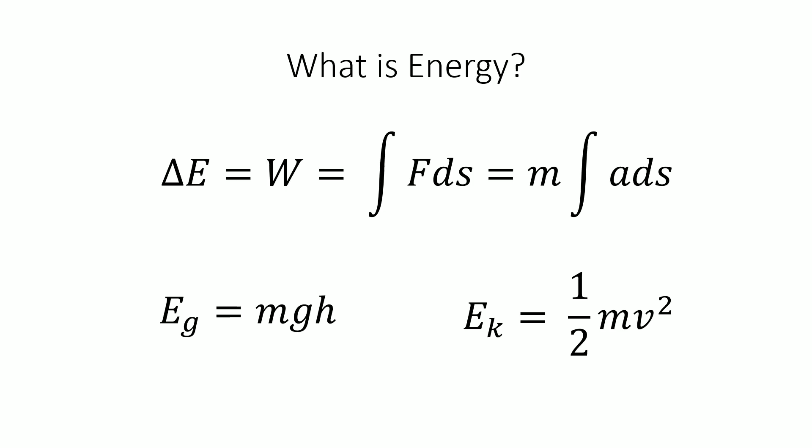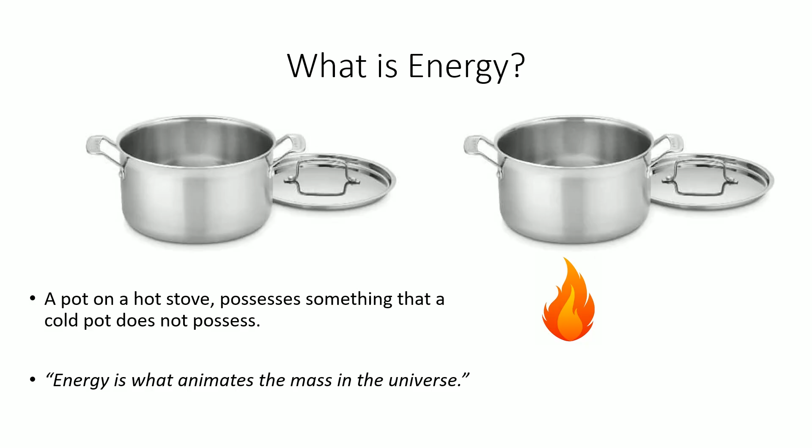A more simple way to think about it is, let's say you have a pot with water and it's boiling. And let's say you have the same pot with the same amount of water, but it's not boiling. Well, the boiling pot possesses something that the other pot does not, and that something is energy. How I like to describe it is that energy is what animates the mass in the universe.

Now, it can take on different forms, and we can convert it from one form to another. What's especially convenient about that is that electricity is a very convenient way to transport energy. So you can convert energy into electrical energy, transport it to another place, and then convert it back into the energy you want.

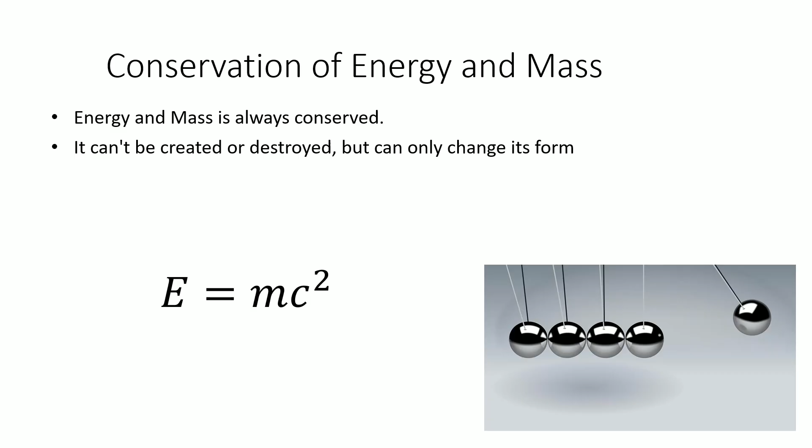Now, before we get into the details of how to do that, we also want to make note of mass. So what Einstein showed us with his famous equation E equals mc squared is that mass and energy are also the same thing, just different forms of it. So mass itself is also just a different form of energy in a way. If you take a piece of mass, multiply it by the speed of light squared, you get the amount of energy that that mass is equivalent to. That's actually how nuclear reactions work. They take mass and convert it into energy. And because the speed of light is such a high number, and speed of light squared is an even bigger number, a small amount of mass gets you a huge amount of energy.

So, for example, you can use a fossil fuel plant or a nuclear plant to use thermal energy, convert it into electricity, transport that electricity to your house, and then plug in, say, a speaker into your wall, and that energy is converted back into kinetic energy, because that's how your speaker works. Or you have a wind farm or a hydroelectric plant. Well, they take kinetic energy, which is the energy of motion, and convert that to electricity, which is then transferred to someone's house, and there it's converted into whatever the person wants. Solar panels work differently. They're actually made out of a crystal which releases an electrical current if you shine a light onto it, and that's how they generate electricity. So there's different ways to do it.

Now, in a lot of power plants, you have a spinning part. In wind farms, you can see it spin right there. In hydroelectric plants, water is spinning a turbine. In thermal power plants like fossil fuel plants and nuclear plants, you have steam that's turning a turbine. Here's why. There's a natural phenomena, and I won't get into all the details of how to design a generator.

I could do that in a different video, but roughly speaking, if you have a magnetic field and you change the velocity of a conducting material within that field, you get a current moving through it. You can design a specific shape of conductor such that if you spin it in a magnetic field, it'll generate electricity. Then the question becomes, how do you make it spin?

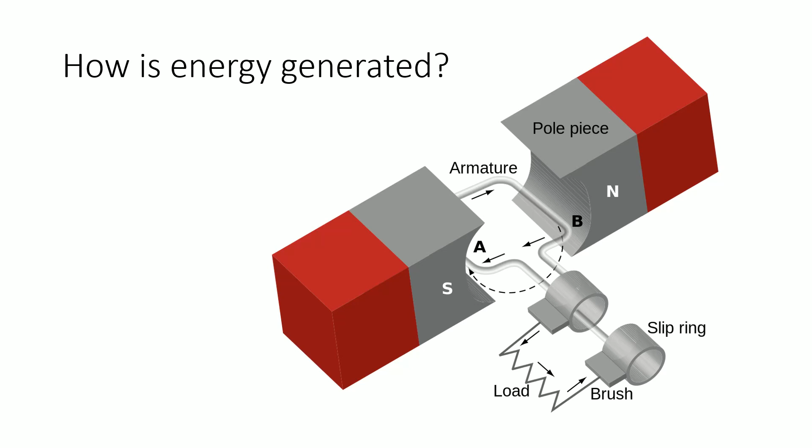A thermal power plant uses steam to rotate a turbine, which is connected to a contraption that looks something like this, and that generates electricity. So the question then is, how do you create the steam?

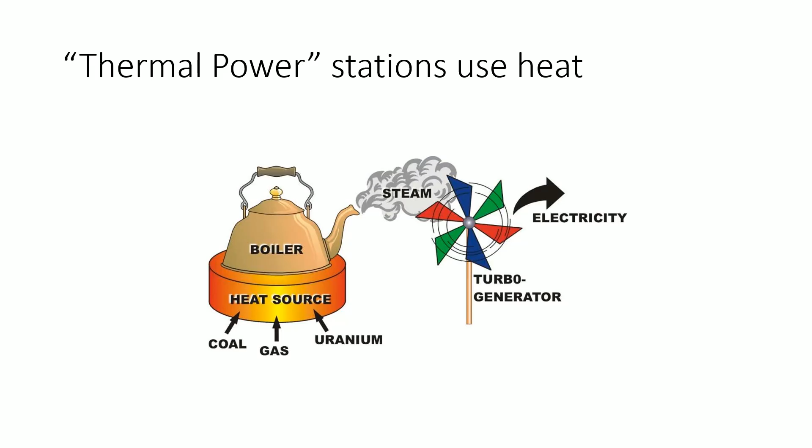Well, by boiling water. How do you boil the water? If you burn coal to boil the water, that's a coal power plant. If you burn gas, that's a gas power plant. If you use a nuclear reaction, that's a nuclear power plant. If you're not using steam, and you're spinning it directly using water or wind, that's a wind farm or a hydroelectric plant.

So you have many different energy sources, and a lot of the time they're separated into those that emit gases as part of the energy production process and those that do not. The emitting sources include biomass, which includes something as simple as burning wood, and fossil fuels like natural gas, coal, and petroleum. Non-emitting sources include solar, wind, nuclear, and hydro.

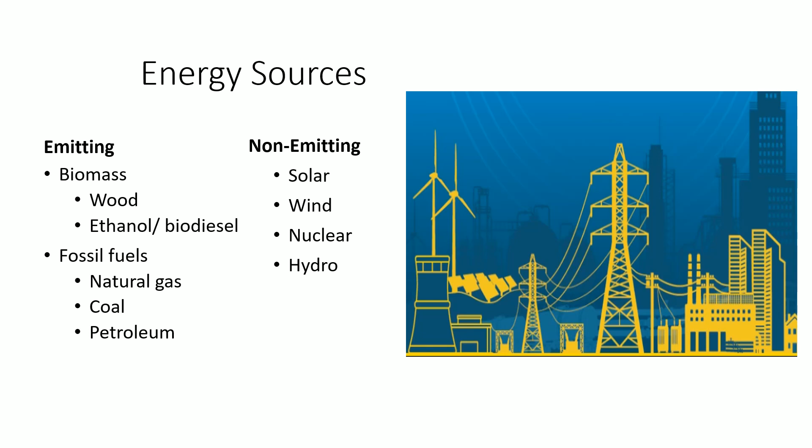Now, all energy production methods do produce waste. People think of renewables as something that doesn't produce waste. They think, oh, solar, wind, hydro, there's no fuel involved, it's just sunshine and flowing water and wind. In that part, there's no fuel involved, but you still have to manufacture the materials, and the materials wear down. You still have to dispose of the materials, so there's still waste involved.

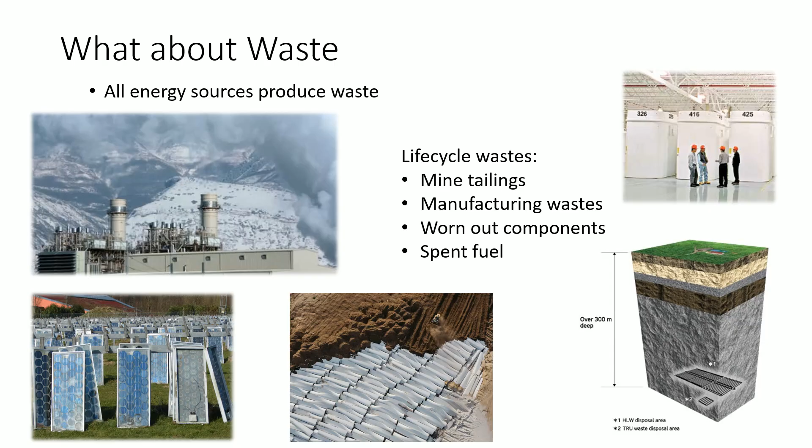They also mention birds being harmed by wind turbines. This is one of the issues with this particular power production method. It's not just birds—birds, bats, and insects do get killed by wind turbines. It's not just crashing into the turbines that can harm these creatures, but the turbines create pressure changes as well. These are quite drastic pressure changes for the lungs of birds and bats, which can also harm them, so deaths can occur from that as well, not just from crashing into the turbines.

There are ways this can be mitigated, or that people try to mitigate it. For example, where wind turbines are built, and when they're operated, so they're not operated when birds are migrating. These methods can reduce harm to birds, but they have limitations. For instance, you want to build wind turbines where there is stronger wind, but that's also where it's easier for birds to soar. Also, rodents can hide underneath the bases of wind turbines, which attracts certain birds that hunt them. So there are limitations to these methods, and it is a subject which is debated.

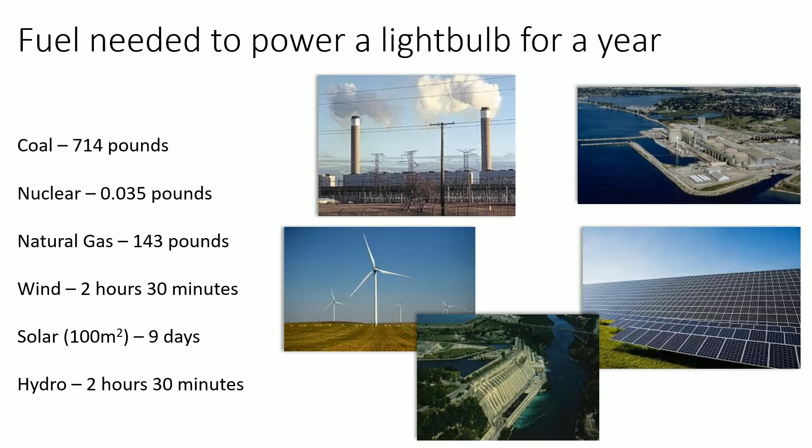Now, for wind and hydro, it's about 2 hours and 30 minutes of operation to produce the amount of energy needed to power a light bulb for a year. And for solar, assuming you have 100 square meters of solar panels, it would take 9 days.

Now, if nuclear is so great, if it's so incredibly efficient, and it doesn't release greenhouse gases when producing energy, then why not use nuclear for everything? Well, there are a few reasons. The reasons discussed on the podcast are people's concern because of a handful of nuclear accidents that were very significant accidents, and it makes people nervous about nuclear energy. They mentioned the difficulty of building very large nuclear power plants.

But there is another reason, which is that energy demand fluctuates. Throughout the day, people need more in the daytime, less in the nighttime. And so energy production also needs to fluctuate. We don't really have technology that is sufficiently capable of storing large amounts of energy. Our battery technology just is not that advanced. So we need to fluctuate our energy production in order to meet the fluctuating energy demand.

Now here's some terms. The minimum amount of energy that needs to be produced throughout all these fluctuations is called the base load. And the maximum amount of energy that needs to be produced is called the peak. You have energy demand fluctuating between the base load and the peak, and so the supply needs to fluctuate like that as well.

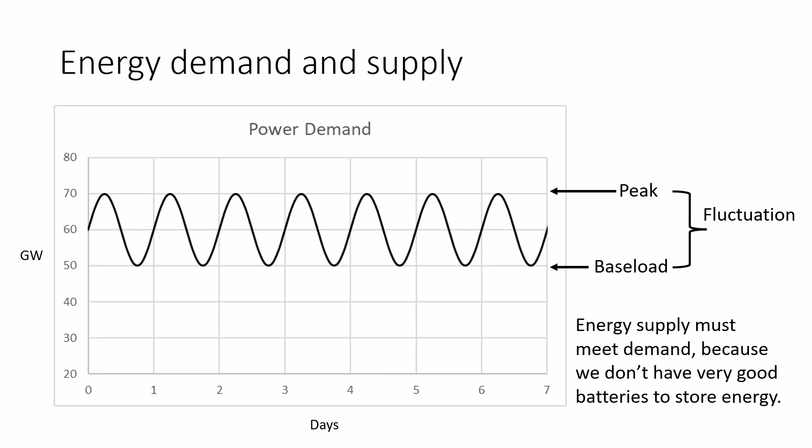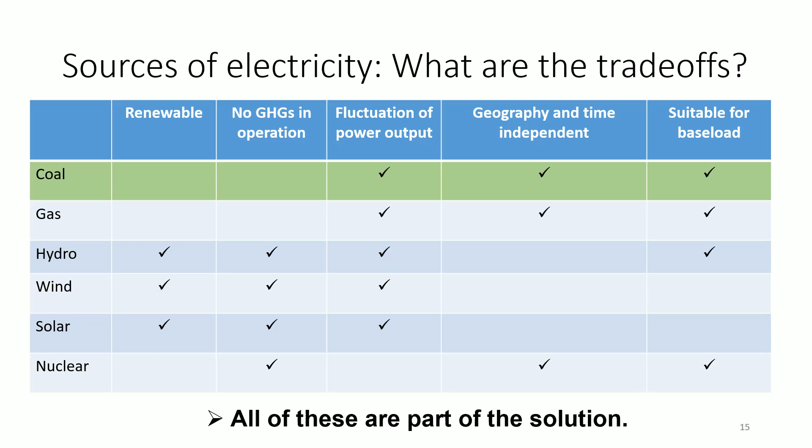So how would an ideal electrical grid look? Well, you have nuclear satisfying your baseload, and then for the fluctuations you use other renewables where possible, depending on the weather and how much of them you can get per day. You use those to reach your peak, to get as close to your peak as possible, and then for whatever's missing, you use fossil fuels to make up what's missing. That's the convenient part about fossil fuel plants - you just turn them on and off, produce as much energy as you need when you need it, and turn it off when you don't need it.

So nuclear for the base load, other renewables as much as you can to reach the peak, and if you still haven't reached the peak with nuclear and other renewables, then you use fossil fuels to make up for what's missing there. That would be the ideal case.

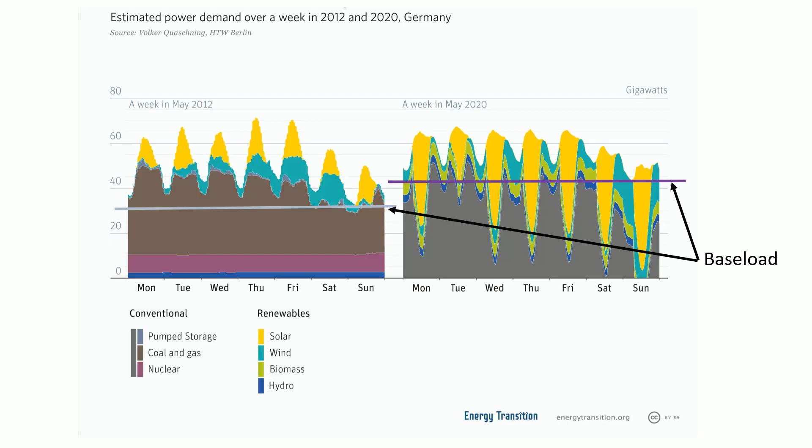Now imagine that nuclear was used as much as possible in these situations. Nuclear would satisfy your base load, so you would produce nuclear to meet that minimum amount in both cases. Then you have much less to make up, and the other renewables can make up pretty much all of it. Then we're closer to this ideal situation that we see on this slide here.

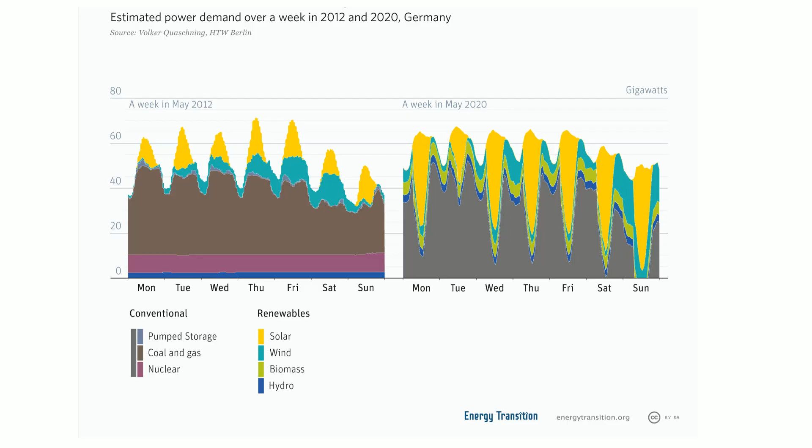Now when they discuss nuclear, they discuss the difficulty of building it. They talk about concrete a lot, and they talk about some nuclear accidents which make people nervous about nuclear. I'm not going to get into the design of different types of nuclear power plants, that could be a whole other presentation, and if you're interested let me know in the comments, I can make a presentation on that as well.

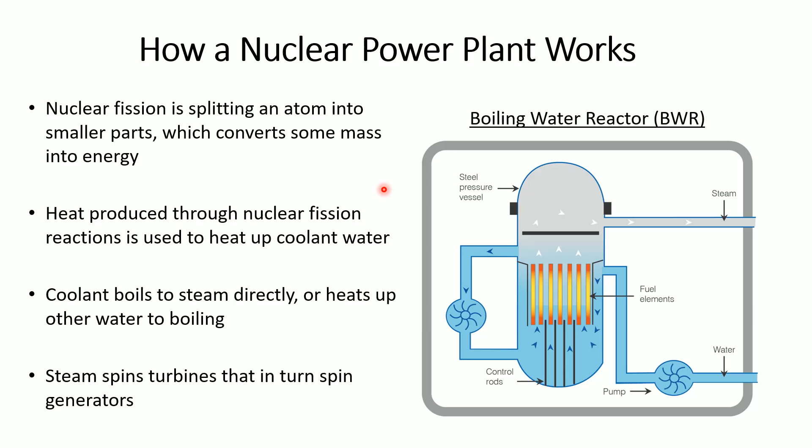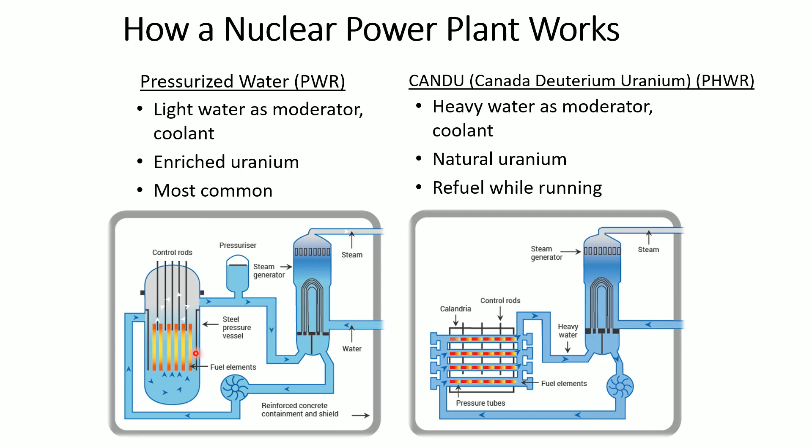You have your reactor where the water heats up. It heats up a different loop of water where you have water coming in and steam coming out. This part is called the steam generator, and it's inside this dome of concrete. A big purpose that serves is to stop radiation from exiting the structure.

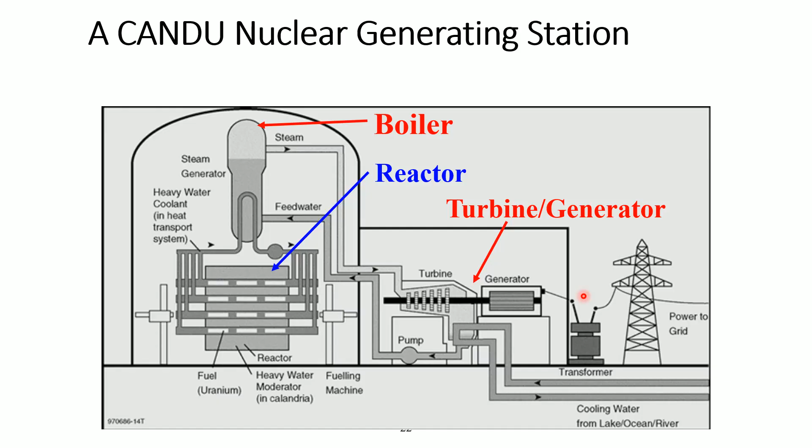So what is radiation? Well, a lot of people think radiation, they think electromagnetic radiation, which we're most familiar with in terms of visible light. This is, for lack of a better word, a type of wave that just exists in nature, called electromagnetic radiation, and they have different wavelengths. The wavelengths we can see range from red to violet.

So the larger wavelengths look more red to us, and the smaller wavelengths look more violet to us. Now, wavelengths even larger than red, our eyes can't detect, but we still use them. These are called infrared, microwaves, and radio waves, which we use for communication, like our cell phones and internet.

Now, once wavelengths get smaller than violet, our eyes can't detect them, but we do still interact with them. These are ultraviolet rays, X-rays, and gamma rays.

Once those wavelengths get smaller, that's when they can get more harmful. Ultraviolet rays, that's why you need protection from the sun. X-rays, that's why there are limits on how much X-ray exposure you can get per year, and why you wear protection when you get an X-ray. Even smaller wavelengths than that are called gamma rays, and in nuclear reactions you get gamma rays coming out too, so you need concrete to block it.

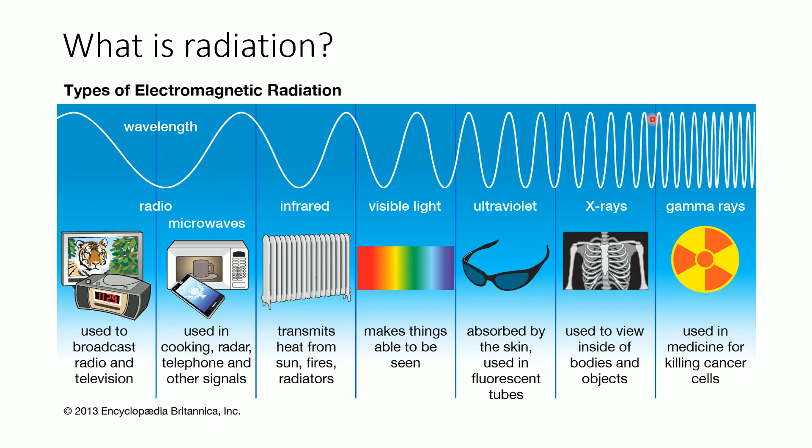But you also have other forms of radiation called particle radiation. Alpha radiation is 2 protons and 2 neutrons flying through the air. Beta radiation is an electron flying through the air, and these are easier to stop than gamma rays.

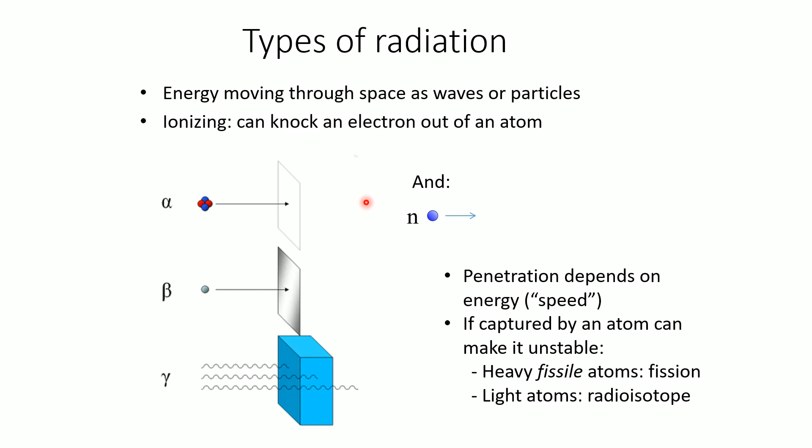But you also have neutron radiation. Neutrons don't have a charge. Protons are positively charged, electrons are negatively charged, so as they fly through the air they might curve and bend towards something that attracts them or away from something that repels them. But neutrons, because they're neutral, just fly straight for a long, long time, and that's what makes neutron radiation more harmful as well. Concrete is used to stop that too.

Now, radiation is a natural part of the world around us. As an analogy, it's kind of like microbial life, germs — it's a natural part of the world around us. We're interacting with the sun all the time. There are objects, everyday industrial and household objects, which also emit radiation that our eyes can't detect. It's just a natural part of the world around us, but if we get too much of the harmful type without using protection for a long period of time, that's when you can get hurt.

For example, ultraviolet rays from the sun, or if you get a very large dose of radiation in a short period of time that your body can't handle, that can be harmful as well. Just like being around germs — you're always interacting with them, but if you're interacting with too many of them over a long period of time without proper protection, that can cause problems. Or if you get a very large dose of them in a short period of time, your body can't handle it and you get problems from that.

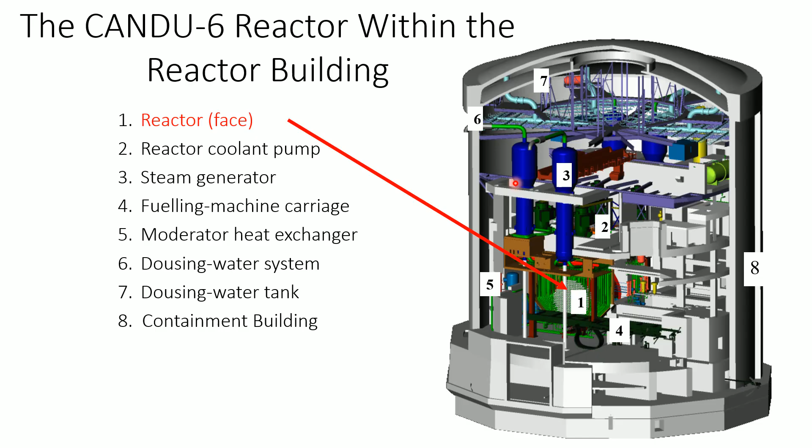When you had radiation coming out at very high levels, there wasn't concrete to stop it. When the initial explosion happened, you didn't have a concrete dome to block materials and gases from spreading upward. And even if the concrete dome breaks, which happened in Fukushima, you had structures breaking, so you have concrete falling down onto the reactor, and even that broken, fallen pile of concrete creates a certain level of protection. You didn't have that at Chernobyl.

So not only was Chernobyl built in a flawed manner, it was also operated in a flawed manner. If it was operated correctly, despite the construction flaws, the disaster would not have happened as it did. If it was operated incorrectly, but didn't have the construction flaws, again the disaster would not have happened as it did. You actually did have safety mechanisms at Chernobyl that were kicking into place as they were supposed to when the plant was being operated improperly. But because that was interfering with an experiment people wanted to conduct, they shut off the safety mechanism. And then the disaster occurred.

It's also important to note that the explosions at Fukushima and Chernobyl were not nuclear explosions like what you'd get from a nuclear bomb. These were conventional explosions, but because they occurred in places with radioactive material, they spread radioactive material through the air and onto the land. Also, if these explosions breach the containment structures, or in Chernobyl's case where there was no proper containment structure to begin with, and you still have a nuclear reaction going on, that can also spread radiation through the area. A nuclear power plant cannot explode the way a nuclear bomb explodes. It's a completely different technological mechanism, even though it's made out of some of the same material.

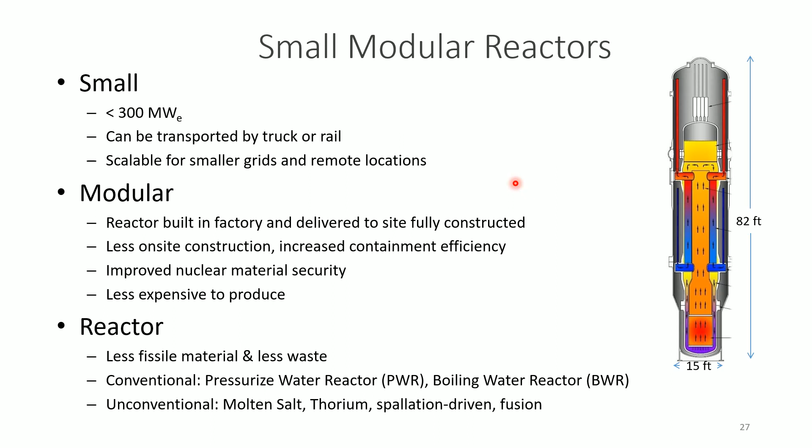Now, small modular reactors are not something new. They've been used for a while on ships and submarines. There have been ideas to use them in space and on airplanes, but people moved away from those ideas in case there's some issue - they didn't really want a nuclear reactor falling from the sky. But they are still used regularly on ships and submarines. You have nuclear-powered ships and nuclear-powered submarines, so they can sail for a very long time using very little fuel. So we already have small modular reactors. What the push is right now is to use them for everyday energy production rather than on vessels. So I hope that gives a good background about the discussion they had.